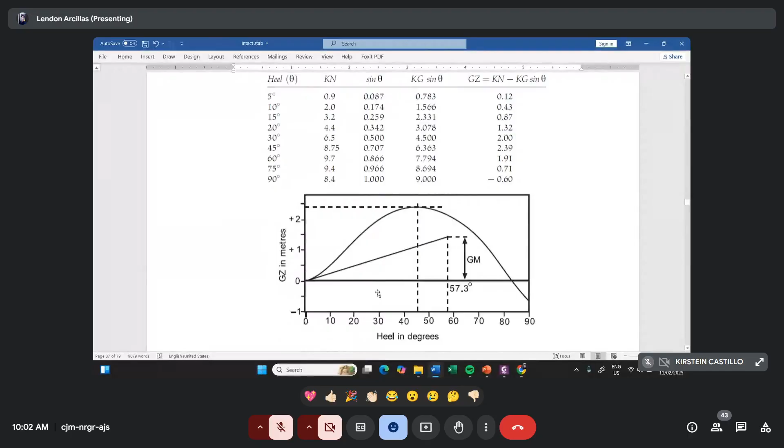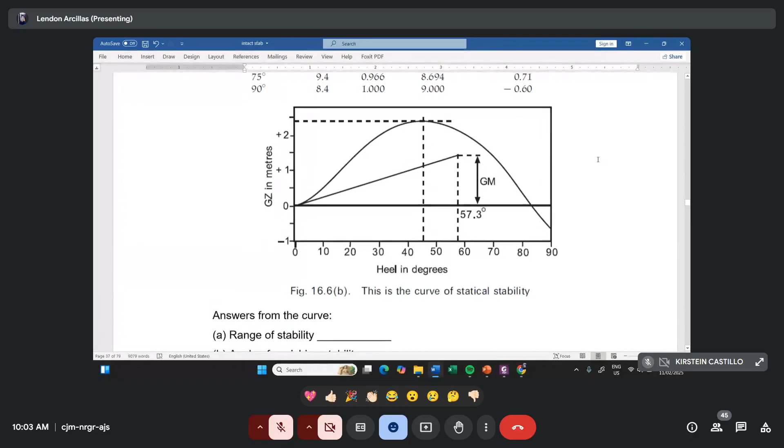So let's have a recap on how we are going to see the description of a statical stability curve. So first is the range of stability. So the range of stability from this part here is, can I call someone? If naalala yung ano natin, so based on your eyes na lang po, kung kita nyo po sa screen. So what is the range of stability?

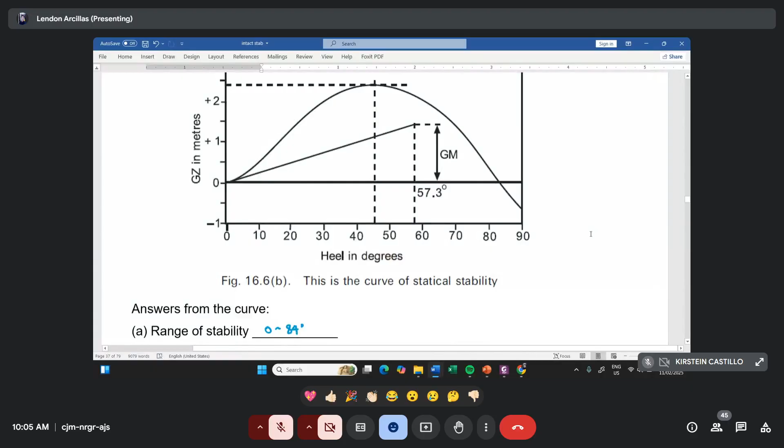84 po. Okay. 84 degrees. Thank you. So, correct. Kung saan nag-stop or kung saan nag-zero yung ating curve, doon din mag-stop ang vanishing stability. How about the maximum GZ?

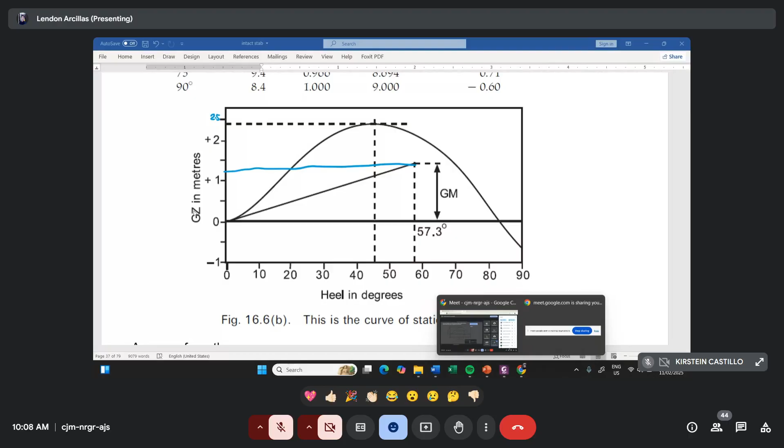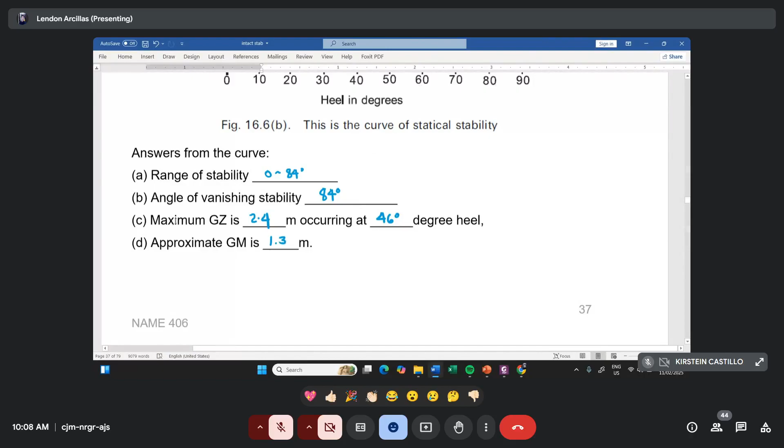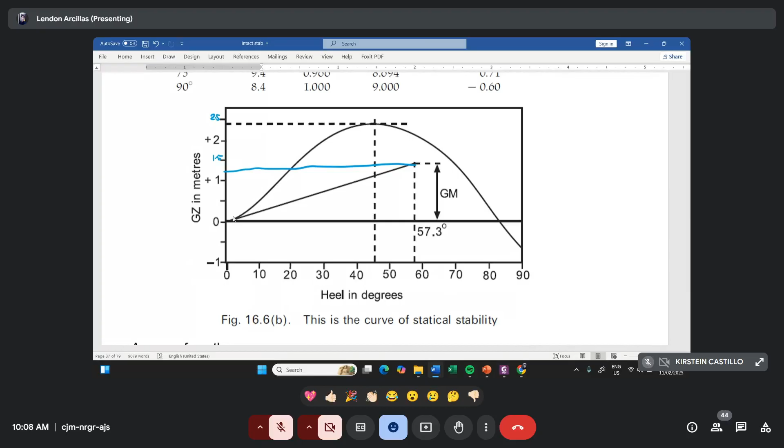So to locate the GM, again, you just have to project the 57.3, that's 1 radian. And then, kung ano yung pinakaunang mag-intersect dito sa tangent line ng curve, you connect it to the slant line, and then kung ano yung intersection ng slant line sa projected vertical line sa degrees, then that's the GM. So magiging GM na tong nasa left side.

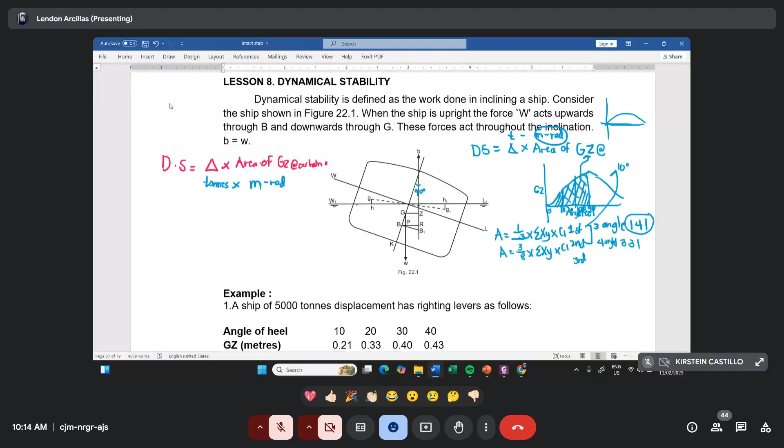So, to find the CI here must be the interval of the angle divided by 57.3 degrees. So, para lang po ma-convert yung 1 degree angle to radian. So, example, pag 0, 10, 20, 30, 40, the interval here is 10 degrees. So, 10 degrees divided by 57.3. So, lalabas dito is naka-radian. Ganun po siya. 1 radian is equivalent to 57.3 degrees. Yan po yung exactly na nangyayari para maging radian po ang sagot.

Gets po ba? So, what if ang ating interval sa degrees ay naka 15, 30, 45. So, the CI here must be 15 divided by 57.3. Bakit natin dinivide ng 57.3? Sir, saan nga po galing yung 57.3 po? That's 1 radian in degrees. Okay po, thank you po. 15 degrees times 57.3 degrees, 1 radian. Kaya dinivide natin to 57.3. So, let's have an example.

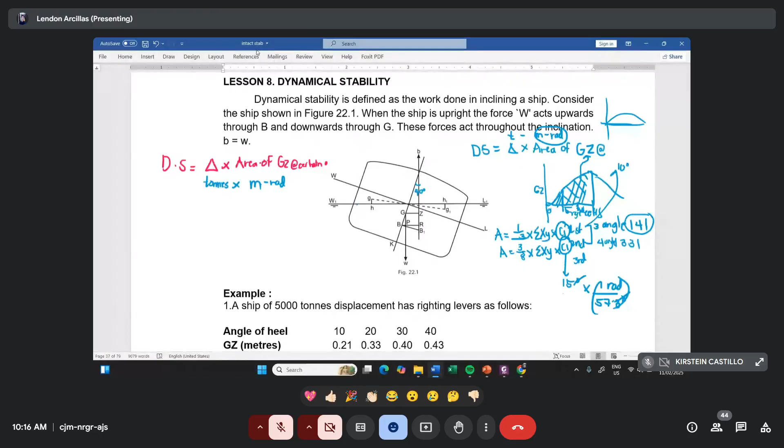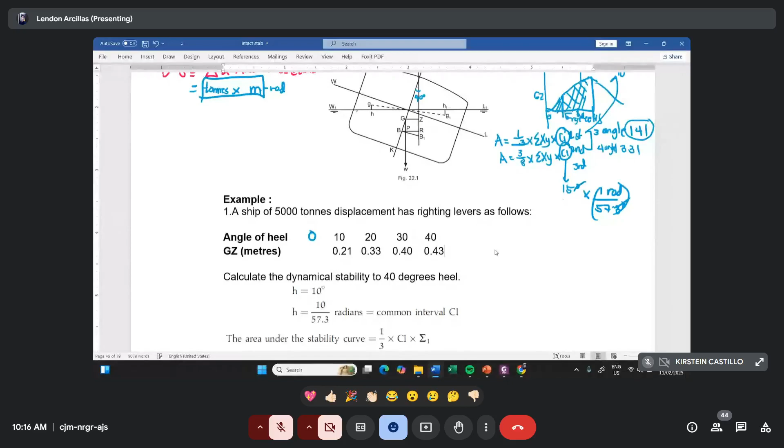So, again, ito po yung unit po nating ilalabas. A ship of 5,000 tons displacement has righting levers as follows. Again, righting levers are what we call the GZ. So, do not forget to include the zero. Kasi po hindi po siya nilalagyan ng value kasi 0 degrees, but it is essential for our Simpson's rule multiplier, 1, 4, 2, 4, 1. So, the angle of heel 0, GZ is 0.

That's 0 degrees. Sa 10 degrees, ang GZ is 0.21. Sa 20 degrees, ang GZ is 0.33. Sa 30 degrees, the GZ is 0.40. And 40 degrees, that's 0.43. You can also look at your manual. That's page 45, guys.

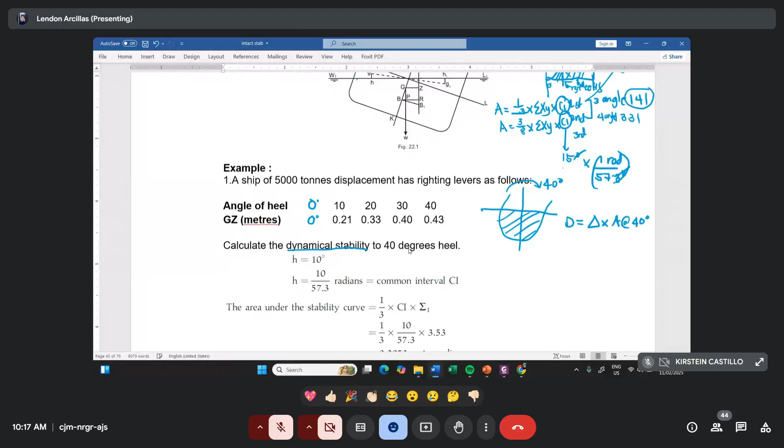So, first, we need to calculate the dynamical stability to 40 degrees. Ano yung work done na kailangan para ma-incline yung barko natin to 40 degrees? So, kailangan natin ng the mass displacement and the area of the GZ at 40 degrees. So, ano kaya ang gagamitin natin dito since ito ay 1, 2, 3, 4, 5 ordinates? So, we can use the first rule: 1, 4, 2, 4, 1.

So, let's have a separate graph for the solving of the areas. So, multiplier. So, naaalala pa bang shortcuts nito? Yan. So, this one is the, ano ba tawag dito? This, you use the GZ, ano po? The GZ. So, 0, 0.21, 0.33, 0.40, and 0.43. So, yan. Ang multiplier po natin ay 1, 4, 2, 4, 1.

So, hindi ko na po siya iisahin dito ha. Basta i-multiply mo yan. Alam na natin kung paano mag-Simpson's rule. I-multiply mo yan tapos i-add yung summation. So, what is the summation here is 3.53. That's ano pa? Meters. Yan. Okay po. Meters kasi ang ano. So, yun. Ito po yung summation of all this one. Kung i-multiply mo to, 0, and so on.

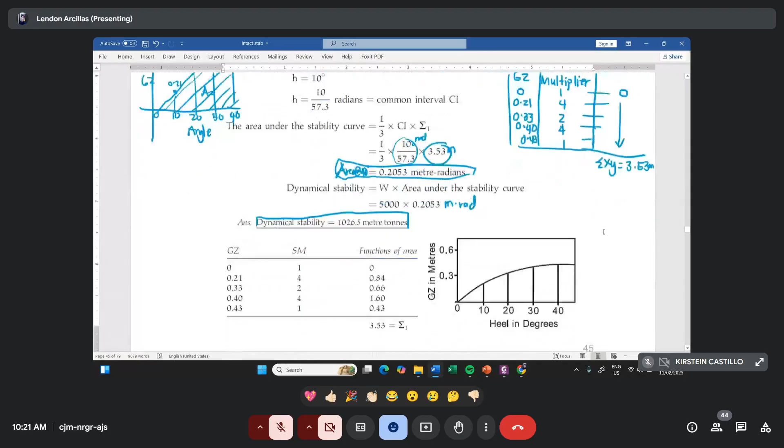So let's have an example na wala po siyang given na ranges of angle of heel and GZ. May mga problem po tayo na wala po siyang interval and wala pong value ng GZ. But there is a given na the shape of the ship and the GM and so on. So, let's try to solve that kind of problem na wala pong value na GZ. Makikita nyo na.

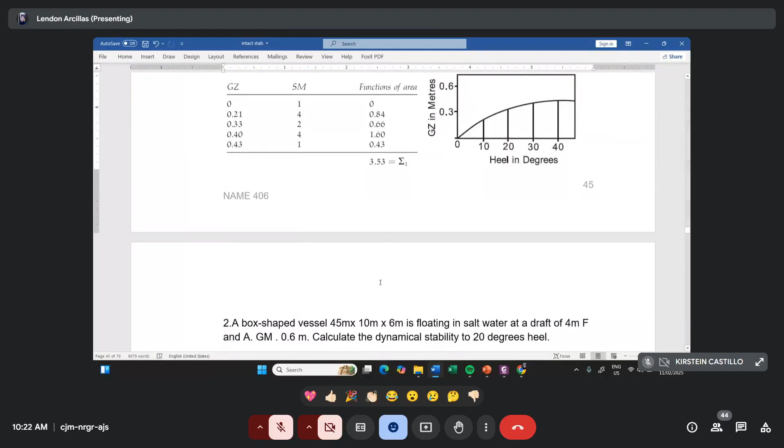Okay, so we have a box-shaped vessel, 45 meters, 10 meters, and 6 meters in depth. It is floating in salt water at a draft of 4 meters, and it has a GM of 0.6 meters. You need to calculate the dynamical stability to 20 degrees. So, yun lang po ang given. Wala po tayong binigay na interval. Wala din po tayong binigay na GZ. How do you solve the value of GZ based on what you have learned on ship hydrostatics?

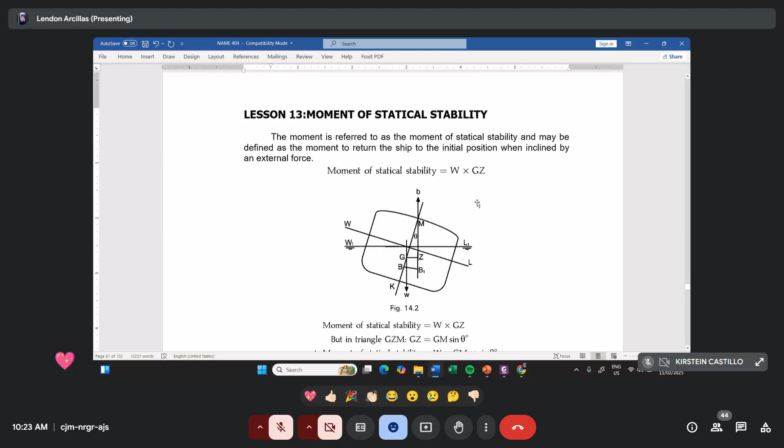Let's go back to the MSS, ang ating lesson last time, the moment of statical stability. Naalala po ba to? Yes po. Okay, so there are two formulas you're going to use to get the value of GZ. That's the GZ for small angle and the GZ for large angle. For small angle, GZ is equal to GM sine theta. Pag large angle na po siya, you use the wall-sided formula.

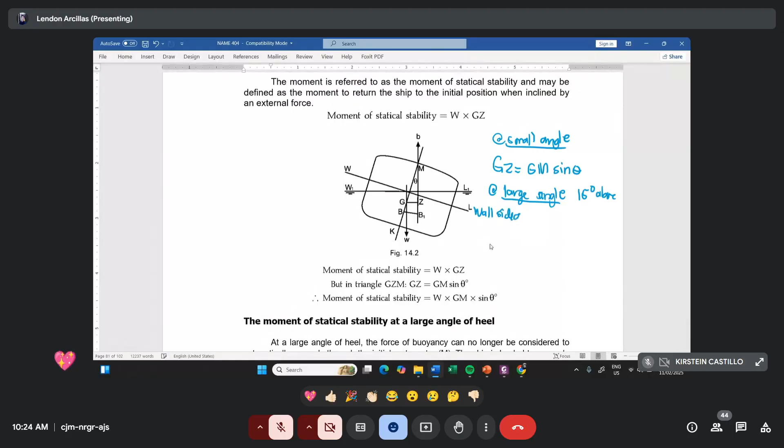So how do you consider this large angle? Actually, this is a very subjective part on what angle talaga ang gagamitin for large angle. But based on this book, large angle pag 15 degrees above na po. So you use the wall-sided formula. Ano ba yung wall-sided formula? Ito po. That's for the large angle, to get the value of your GZ.

So again, ang consideration po natin sa large angle is pag tumaas na po siya sa 15 degrees above. But there are cases po on this problem that pag 10 degrees na po siya, ginagamitan na po niya ng wall-sided formula.

But we'll have a standard for this one since subjective pa nga po ang ano na to. Ang pinaka-reason naman po nito is kinuha lang po yung GM sin theta because di ko siya masyadong ma-explain dito. Ito po siya. Itong intersection na to, itong pinaka-smaller angle at 5 degrees pa siya, it will be solvable using the sin theta, cosine theta, and the tan theta. Solvable pa po siya pag 5 degrees sa GZ.

But when it comes to this part here, siguro po mga 6 degrees and so on, up to example 20 degrees, hindi na po siya solvable dito using sine, cosine, and tan theta. Ito po, hindi na po siya mabubuong triangle. Kaya po nag-iiba yung ating GZ formula na hindi na po magagamit ang GM sin theta pag large angle. Okay?

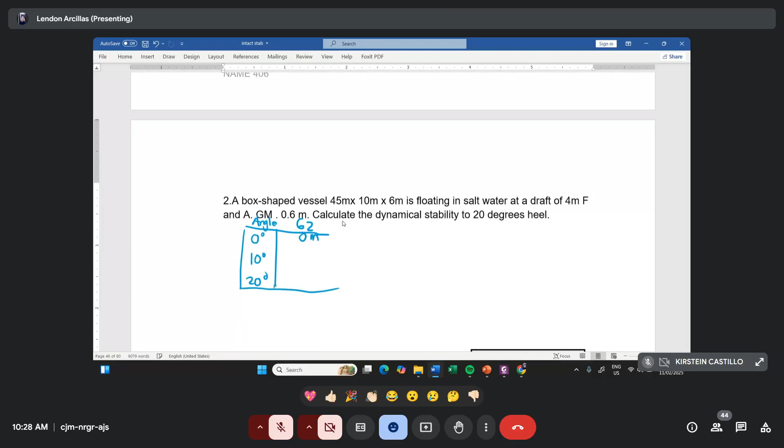Nasa sa inyo po yan. The smaller the range of your interval, the more exact is the answer. For the sake of this problem, ito muna. Okay? 0, 10, 20. Gets po ba? Yes po. Okay. So, paano natin malalaman ang GZ? So, again, sa GZ, you'll use the formula for the small angle and for the large angle. So, for 0 angle, automatic ang GZ is 0. How about the 10 degrees? So, considered po natin ang 10 degrees as small angle muna. Kasi ang sabi ko, 15 degrees above, you'll use the

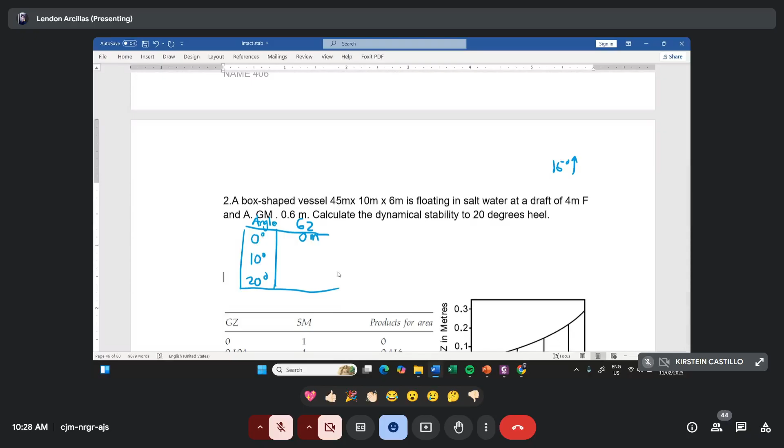wall-sided formula. Okay po. So, since tatlong ordinates po to, you can use the first rule. Multiplier, that's 1, 4, 1. So, how do you find the GZ at 10 degrees? So, automatic GZ at 10 degrees is equal to GM sine 10 degrees, since smaller angle pa po siya. So, GM natin is 0.6 times sine 10 degrees. The GZ at 10 degrees is equal to 0.104 meters. Kuha? Multiplier.

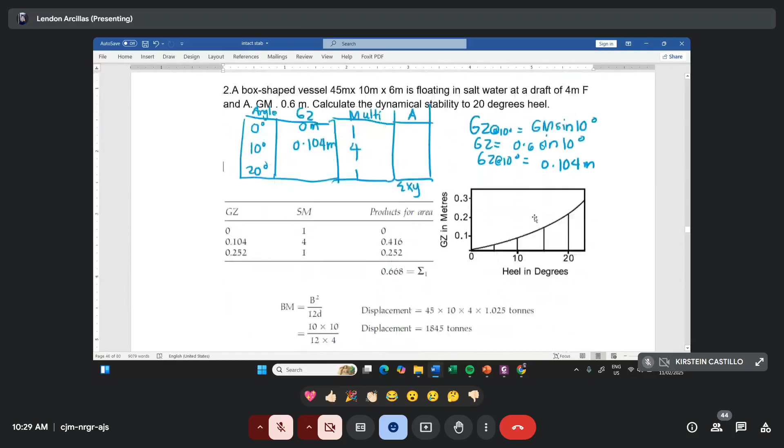Yeah, products of area pala to. Okay po ba? How about the 20 degrees? So, the 20 degrees, hindi na po natin magagamitan ng smaller angle. So, you use this one, the wall-sided formula. So, sa wall-sided formula, needed ang BM, needed din ang GM. So, may GM na po tayo. Wala po tayong BM. But since, according to the problem, ito po ay box-shaped vessel, we can calculate the BM. BM is B squared over 12D.

So, ang B natin, ang beam natin doon ay 10 and ang ating draft ay 4. So, that's 10 squared over 12 times 4. So, the BM here is 2.08 meters and GM is 0.6. Now, you can use the wall-sided formula. So, bakit ginamit natin? Kasi po, ang degrees natin is 20 degrees.

So, again, be careful with this formula sa calculator since mag-iiba po ang kanyang rule when you multiply sin theta agad. Pag hindi nyo na-parenthesis yun sa calculator, mag-iiba ang inyong value ng GZ. So, be careful with this. So, kung mas mabuti, isa-isahin nyo muna. Unahin mo ang multiplication bago yung division, subtraction and addition. So, the value of GZ at 20 degrees using the wall-sided formula is 0.252. So, nakuha pa ba? 0.252.

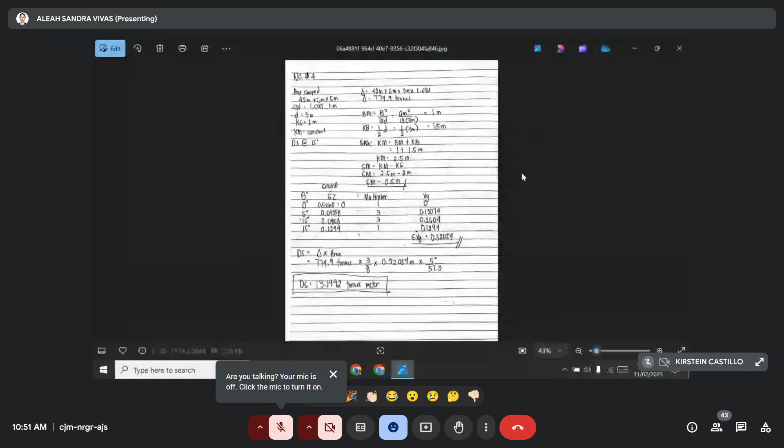Let's have this type of problem. Sige, si Aleah na magsagot dito. Number 4. Yan, mahaba pa to. Oy, andyan ka? Yes po. Ayan, sagutan mo to, number 4. Kinabahan. Okay na. Okay na po. Sige, go. Mabasa mo ba ang problem? Ako na lang magbabasa.

So, a box-shaped vessel, 42 meters by 6 meters by 5 meters depth, is floating in salt water, 3 meters draft, and it has a KG of 2 meters. Assuming that the KM is constant, since ito po ay box vessel din, calculate the dynamical stability in order for the ship to incline up to 15 degrees. Can you explain na po?

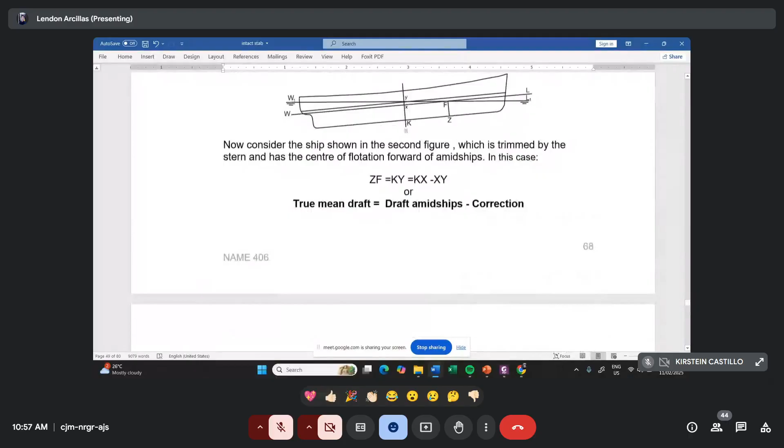So ano ba tong intact stability criteria? So these analyze the data of vessels that behaved well, and especially the data of vessels that did not survive adverse conditions. So various researchers and regulatory authorities like the Marina, IMO, MARPOL, and the SOLAS define this criteria for deciding if the stability of the vessel is satisfactory.

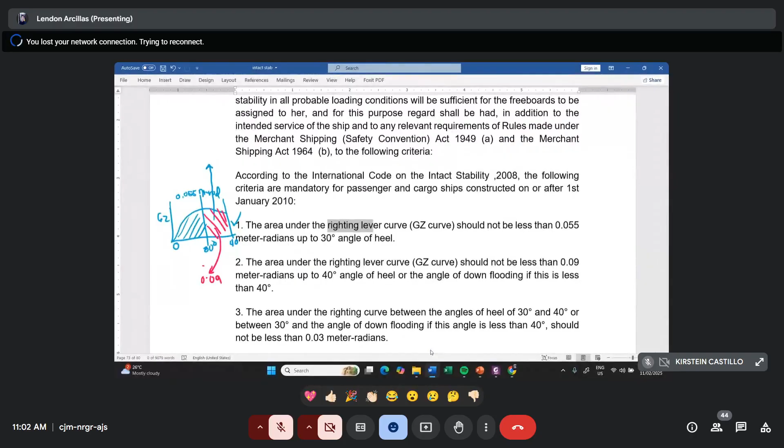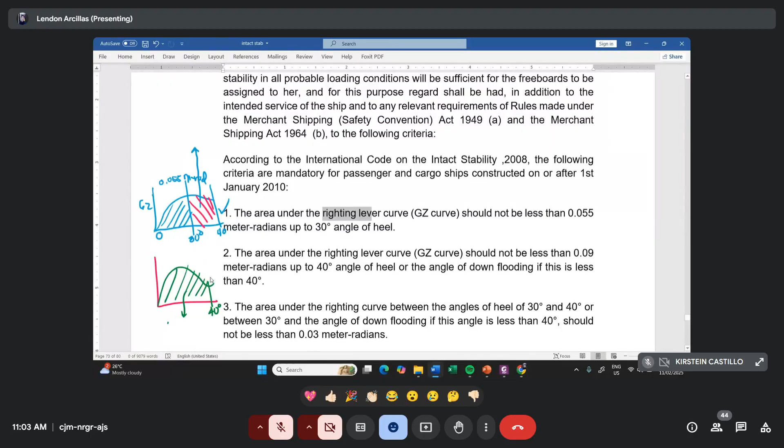Okay? So, sabi daw dito, at 40 degree angle, that's what we call the angle of down flooding. So, ano ba yung ibig sabihin nun? So, at 40 degrees, guys, when you are inclining a ship at 40 degrees, it is assumed that the deck of the ship is immersed in water. That's why it is called the angle of down flooding. Again, it is assumed that at 40 degree angle of a ship, when it is inclined, that's the time that the deck of this ship is immersed. That's why a 40 degree angle is what we call the angle of down flooding. So, at that point, it must be greater than 0.09 or else it will fail the IMO Intact Stability Code of 2008.

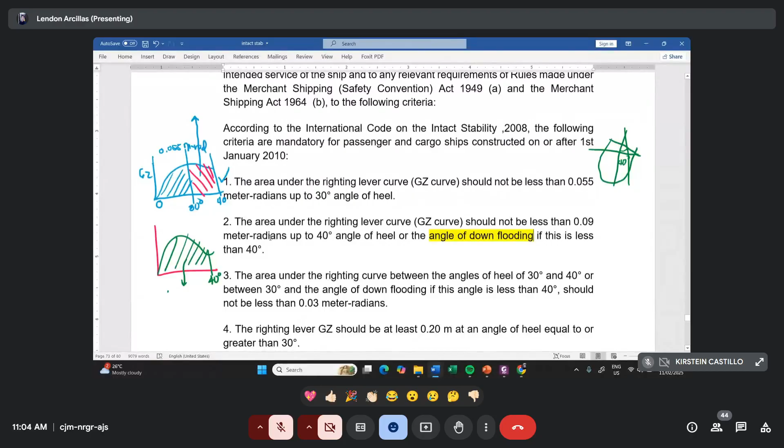The next requirement, the area under the righting lever between 30 to 40, ito na po yung ibig sabihin ko kanina, the angle of down flooding, if this angle is less than 40 degrees, should not be less than 0.03. So, at 30 degrees to 40 degrees, dapat din siya 0.03 meter radian ang area nito. Not less than. Dapat above para pasado po siya.

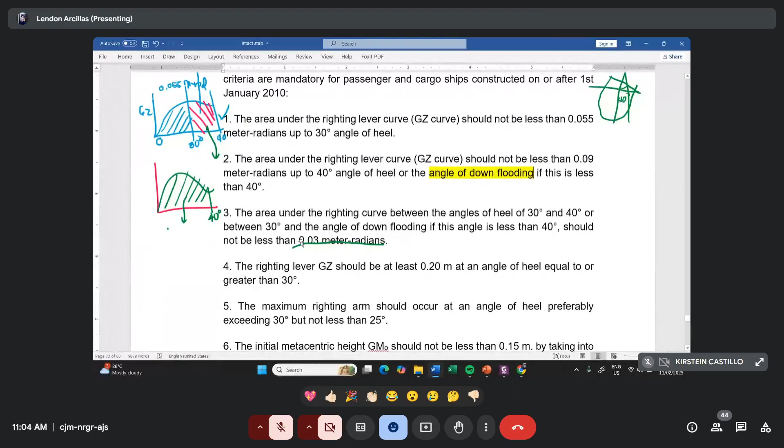So next, the righting lever should be at least 0.20 at an angle of heel equal to or greater than 30 degrees. So at 30 degrees and above, the GZ must be 0.20 meters. Okay? So, pagdating ng 30 degrees, kasi di ba bababa pa siya pag 0, 10, 20. Pagdating ng 30 degrees and above, dapat po at least 0.20 meters ang kanyang GZ. So that's the fourth requirement.

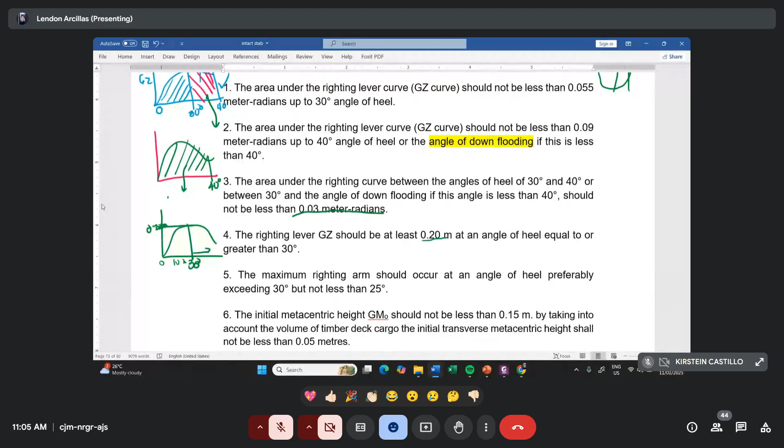The fifth requirement, the maximum righting arm should occur at an angle of heel preferably exceeding 30 degrees, but not less than 25 degrees. So the fifth says here that ang pinakamalaking GZ daw o yung peak ng inyong curve, dapat siya ay belong sa 25 to 30 degrees. Okay? So the maximum righting lever or the maximum GZ, guys, should occur at an angle of heel of 30, not less than 25. So 26 to 30 and above.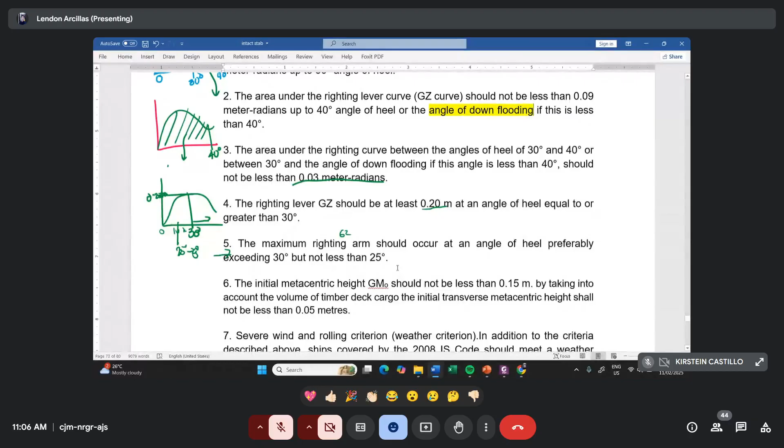Okay, the sixth, actually dito lang naman hanggang 6. The initial metacentric height or the GM should not be less than 0.15. Nasabi ko na to dati, I think. By taking into account the volume of the timber deck cargoes, the initial transverse metacentric height shall not be less than 0.05 meters. Okay, so to find the value of GM, paano natin kukunin ang GM? 57.3 and then locate the tangent line here. Ang GM must be 0.15 and above.

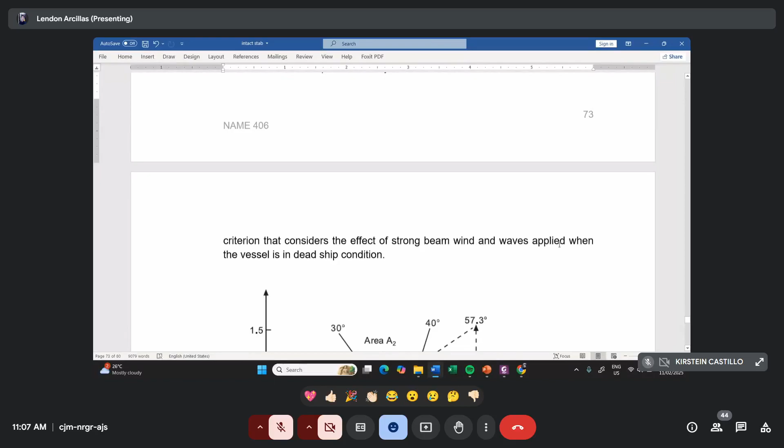So, severe wind and rolling criterion, meaning in addition to the criteria described above, ships covered by the 2008 IS code should meet a weather criterion that considers the effect of strong beam wind and waves applied when the vessel is in dead ship condition.

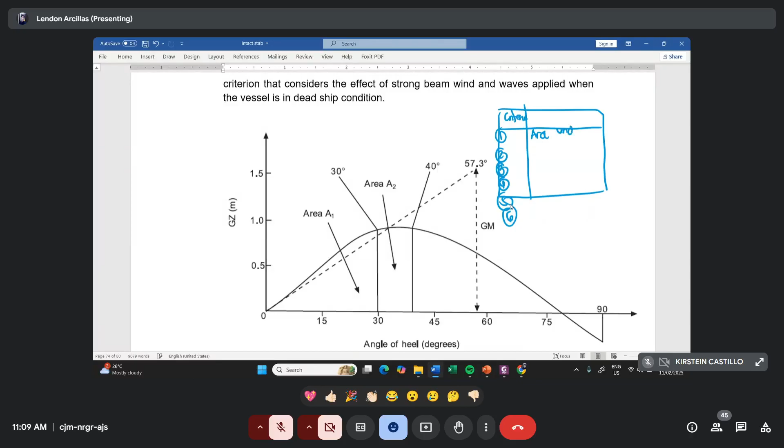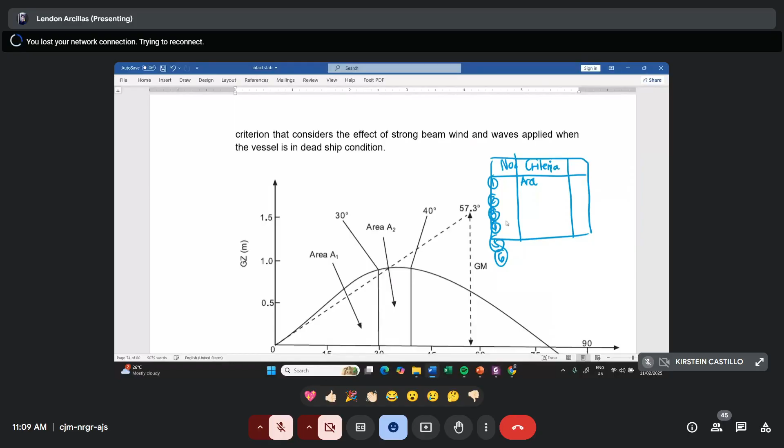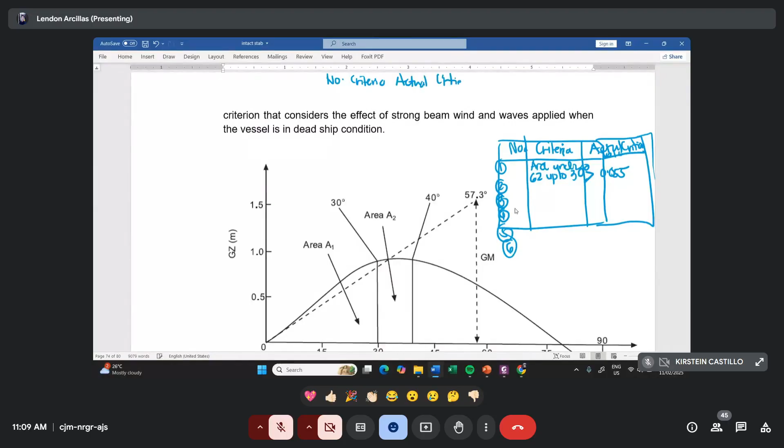Area under GZ up to 30 degrees must not be less than 0.055. Then, pinakita dito ang actual value, and then ano yung critical value. Then, ano yung assessment. So, ulitin ko. Number, criteria, actual value, the critical value. Actually, wala na tong critical value eh. Naka-table po siya, para may checklist po tayo. Critical value, and then yung assessment, basta isusulat ko naman to sa board.

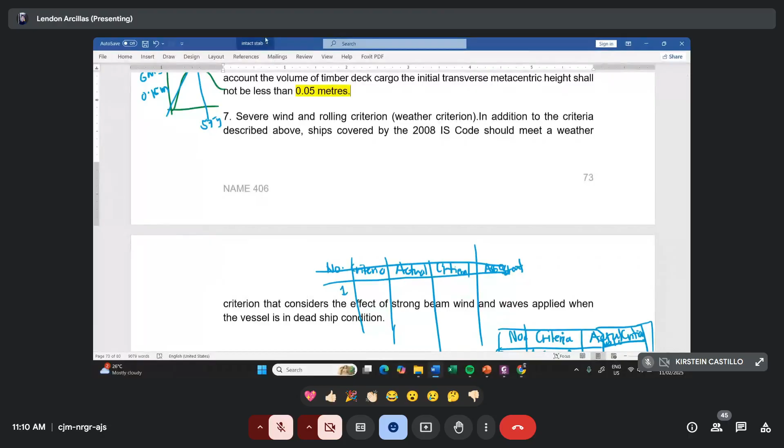So, rule number 1 is that our area under 30 degrees must not be less than 0.055. Example, the critical value is not less than 0.055 at 30 degrees. At pag nakuha nyo sa inyong calculation is 0.150, so pasado po siya, pass. Rule number 2, 40 degrees, 0.09. The critical value is 0.090, and nakuha nyo is 0.630, then you get pass. Okay? So, ganun po ang gagawin natin next meeting.

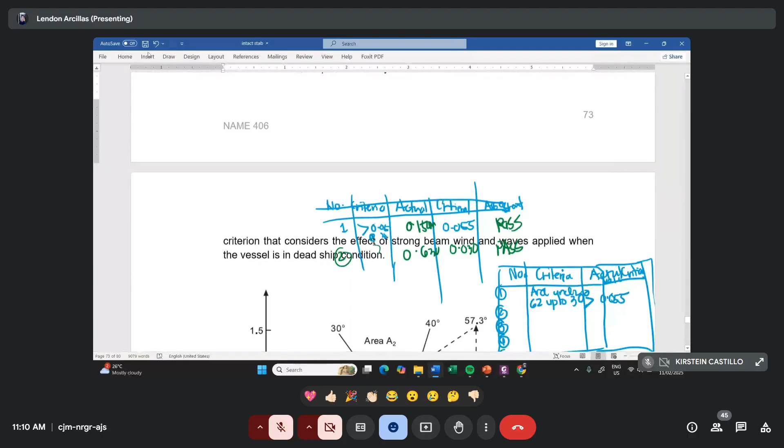So, from solving the GZ, from getting the GZ from the given KN curves or GZ cross curves, to getting the corrected GZ, up until building the GZ curve graph, and up until finding the range of statical stability, vanishing, GM, maximum GZ, up until the dynamical stabilities at any certain angle, and up until the IMO criteria. Actually, this is the heart of the intact stability. Very advanced po tayo sa lesson, since mabilis lang naman tong intact stability na lesson.